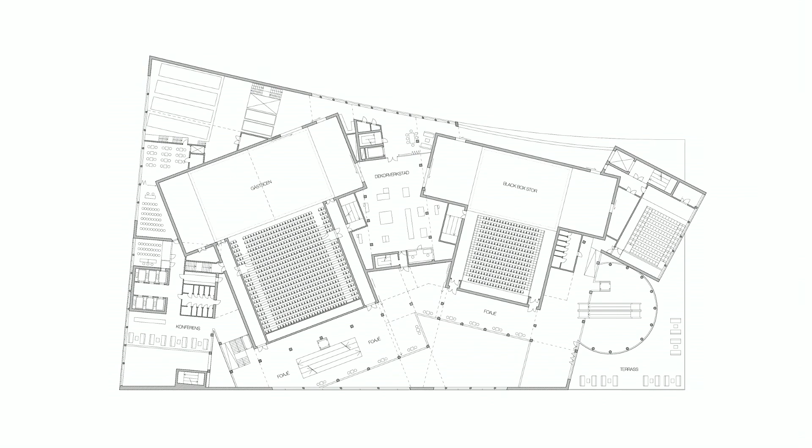Each feature or add-on would direct views towards a particular vista in the surrounding landscape, hence the title of the project, the Tower of Many Views.

Together, the varying views set the basis for a continuously unfolding narrative that links the tower to the specificity of the landscape surrounding it. And finally, a flying balcony at the top that offers panoramic views high above ground.

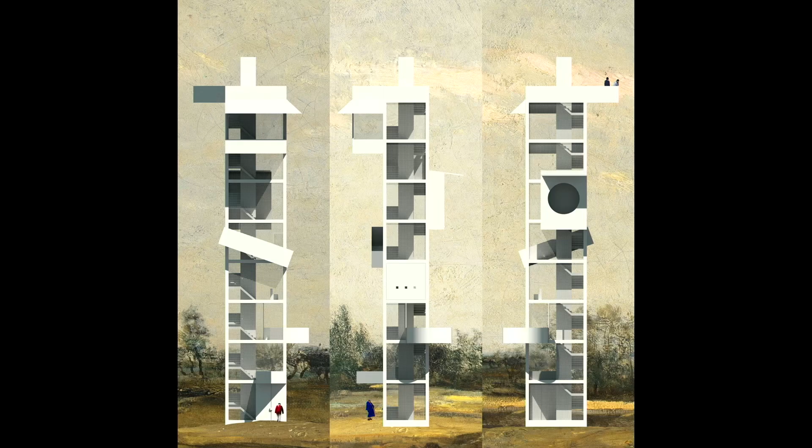Here we see the tower situated in the landscape. So the tower becomes a viewing machine, a vertical collection of framing devices.

All right, so now on to some examples of private residences that we've been working on lately. Several of these residences are houses that explore a kind of playful monumentality through composition, proportions, fenestrations, etc. How can one make a 120 square meter house kind of still seem big and significant?

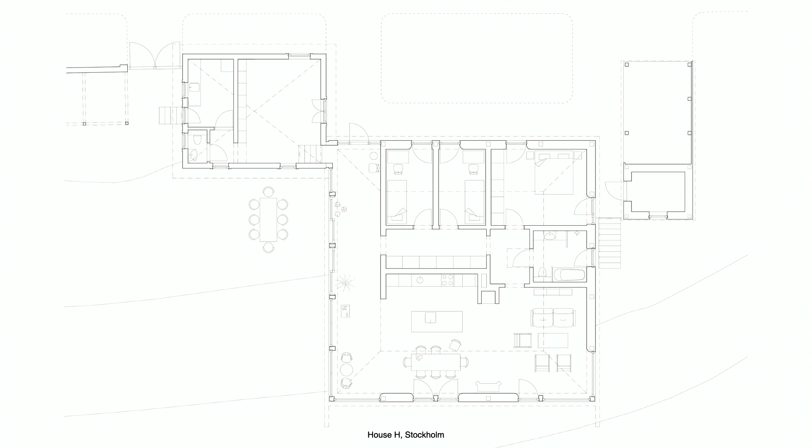Okay, so like many architects, we are often asked to do a lot on a limited budget. This summer house for a young family who had bought a small lot just south of Stockholm in a pastoral landscape characterized by mixed forest and open fields. This house became an example of that, let's say.

To increase a sense of privacy in relation to the neighbors, we proposed two walls. One actual wall on the right-hand side in this drawing, and then a wall-like house on the other side. The neighbors here, they are ordinary, but not ordinary in a beautiful way, but kind of ordinary in a just ordinary way.

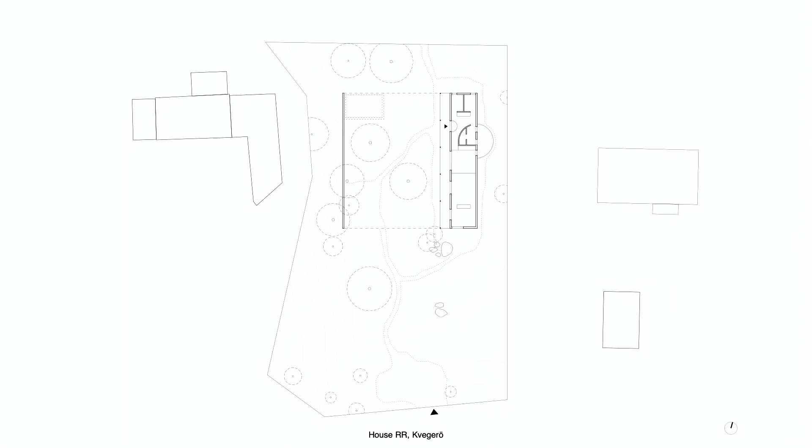So we thought it was good for the house to shield them off somehow. There is this veranda or loggia that opens to the garden, and then a small circular patio on the back of the house. The interior is basically one elongated space that is loosely divided into social and private spheres that extend onto the veranda, which spans the full length of the house.

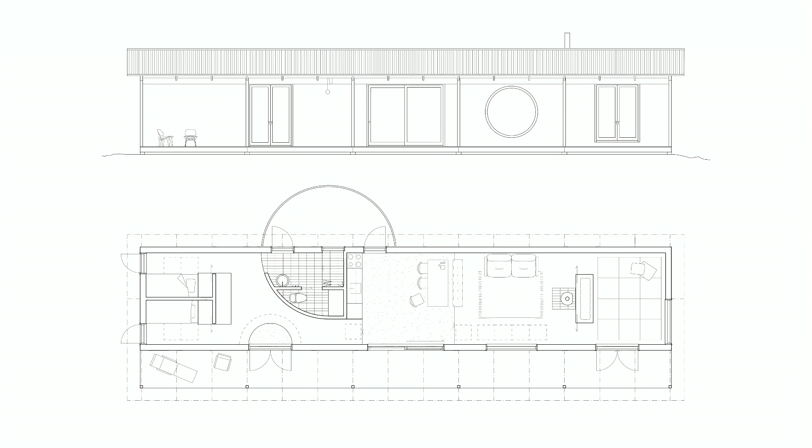As Daniel said, we enjoy making these quite big models to explore the architecture. Here, the exterior has a rhythm of post and raft details, against which there is this play between different geometrical openings.

Approaching the site, a small pitched gable appears on a gently sloping hill facing a field. Coming closer and moving up the hill into the garden, now the main facade is revealed, fronted by the veranda.

The sense of order that the facade brings is sort of loosened once we enter the house. The interior is an open space that has been furnished with four monomaterial masses, let's say, and together with shifts in floor levels, these masses loosely define the spaces.

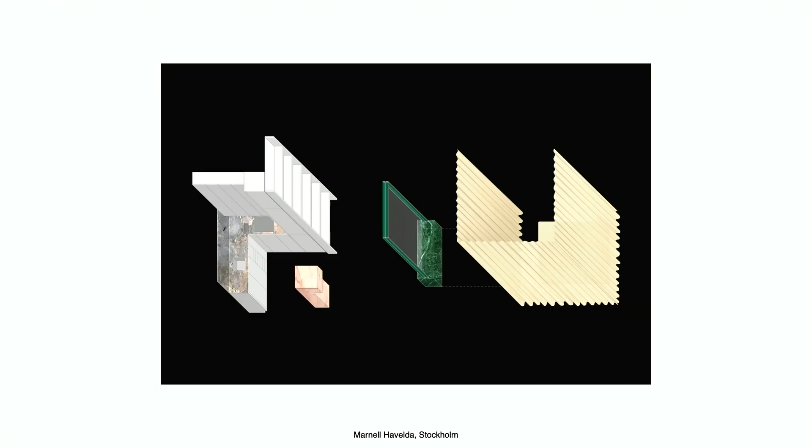Sometimes we do apartments and interiors as well. Most buildings in central Stockholm, where we have the projects, are built somewhere between 1880 and 1930, so there is often this historical aspect to take into account.

Especially the apartment here explores a similar approach to the small house that we just showed, where the interior, or much of the design, happens in between the scale of furniture and architecture, let's say. And together a series of spatial relations makes the room seem spacious and varied, despite their relatively modest size.

We designed this apartment for a family that then grew and moved into a larger one, which we are currently working on.

With this type of work, there is often this typical request from a client who wants to rethink the space plan so it better suits the life of today. And we often find ourselves negotiating this while somehow paying attention to the origin of the building and the character of the existing architecture.

So this is an ongoing work, let's say, but now onto some more speculative practices or projects.

For some time now we have been working on how architecture can come about by collecting, altering and recombining existing things. It's about things that start from other things, or things that might have been lost and found. We're interested in how used building elements and materials can contribute to a shift in mindset in architecture.

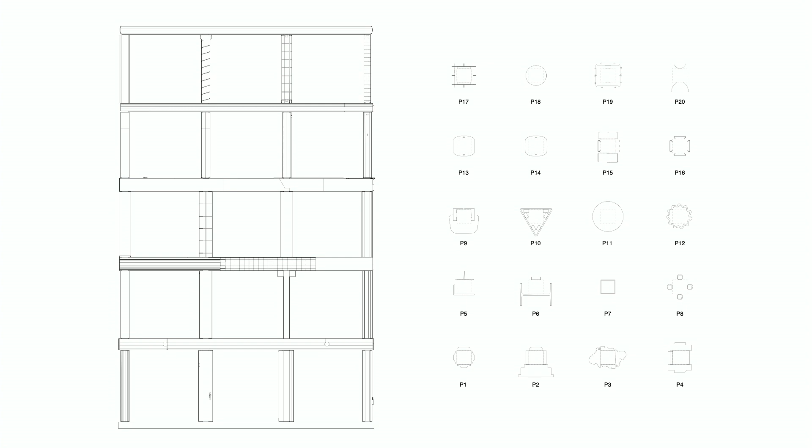An issue was also that the project was installed and the exhibition opened during COVID, so there was no possibility for us to be around when the technicians put the pieces together. Therefore we had to develop really precise documentation.

The design was also conceived using partial mock-ups in our studio and a digital model that incorporated material qualities such as glossiness and patina.

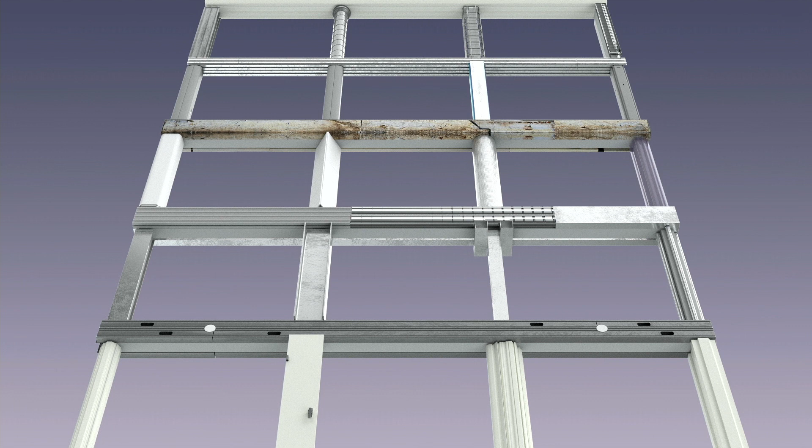The composition explores the different aging of materials as well. Solid aluminum profiles, for instance, even if they're really old, have literally no signs of age, while other materials can have a lot of patina.

Here's the 5-meter tall structure in the exhibition hall at the museum. Based on the building elements' qualities, materiality, color, scale, patina, etc., we developed a loose associative order that told us where the different elements would go.

So the city is filled with stuff, objects and architecture. How can a close look at such existing material, the way it's used, its genesis and varying temporality, as well as the flows that support it, be turned into a proposition for architecture? This work was an attempt to begin to study the question of how architecture can incorporate elements from radically different origins and still somehow make sense as a whole.

Another thing we wanted to do with these kinds of projects is to understand the life of building materials. Like, for instance, what happens to elements and materials when buildings come to an end?

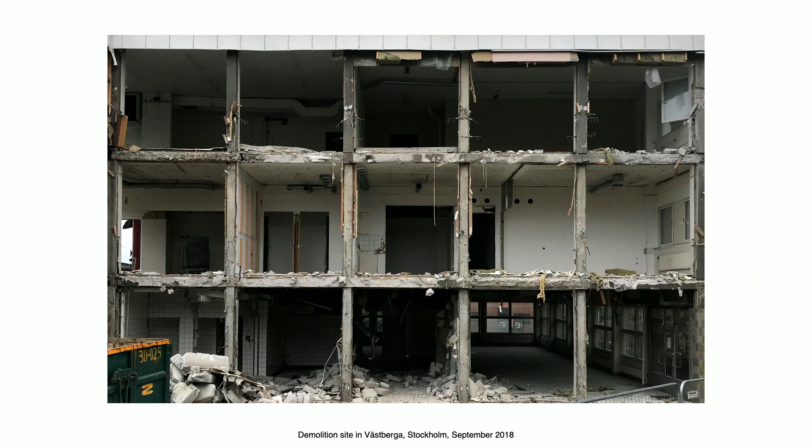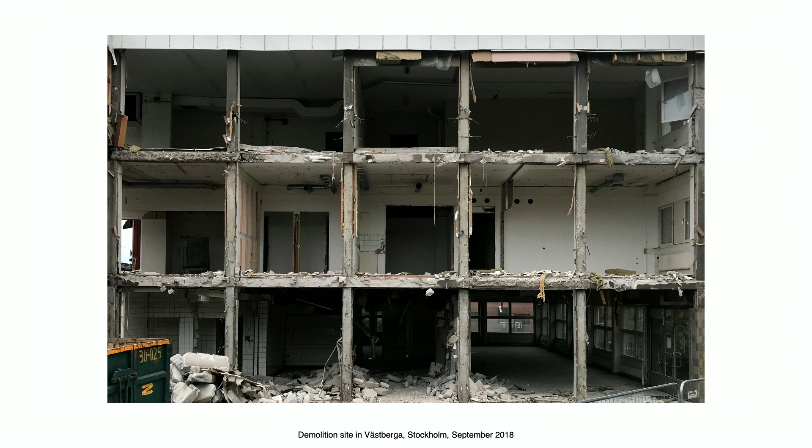Since around 5-6 years, we have been doing a series of excursions and scavenger hunts where we visit demolition sites, different outlets for used building elements, recycling centers, and even active landfills, to talk to people who work in this flow of used materials. On such visits, we sometimes collect used materials such as concrete rubble, plastics, bits of plasterboard, and steel studs, etc.

During these trips, a demolition worker told us that these building elements are the ones valued today - i.e. elements that are either very old and have a lot of character, or ones that are really new and standardized. But the rest, what makes up most of the built environment around us, still has no real value once it's deinstalled.

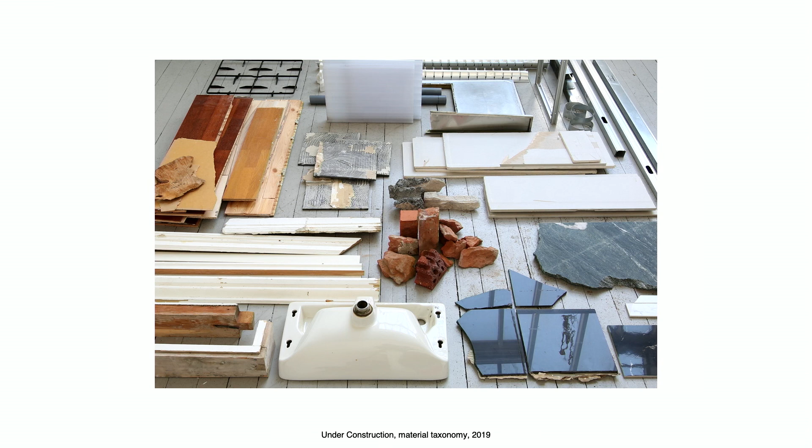One of the most persistent architectural conventions is to consider abstract space before material entities. Building elements and materials should be subservient to a larger whole. To us, this approach is aligned with a view on the world inherited from industrialism, where anything can be sourced anew and molded into shape indefinitely, as if the world were endless.

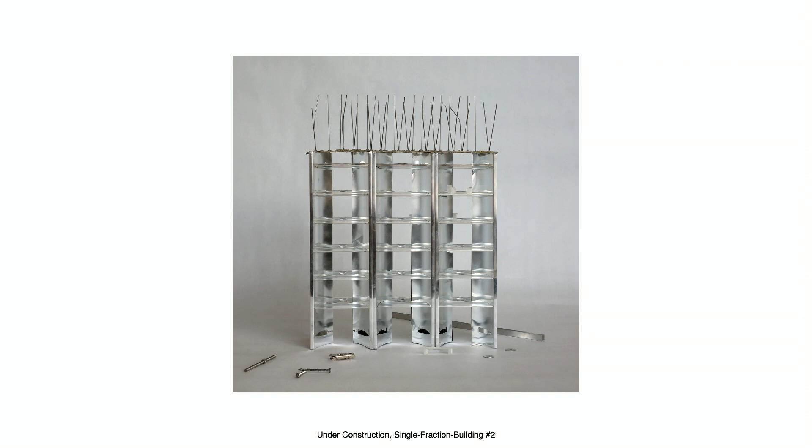As further responses to principles linked to flows of used goods and recycling, each of the five houses consists of one type of material. This mono-material approach corresponds to thinking of materials in terms of fractions throughout their life cycle, which significantly increases their possibilities for future disassembly and recycling. So each building becomes a depot of materials, which later can be rearranged into something else.

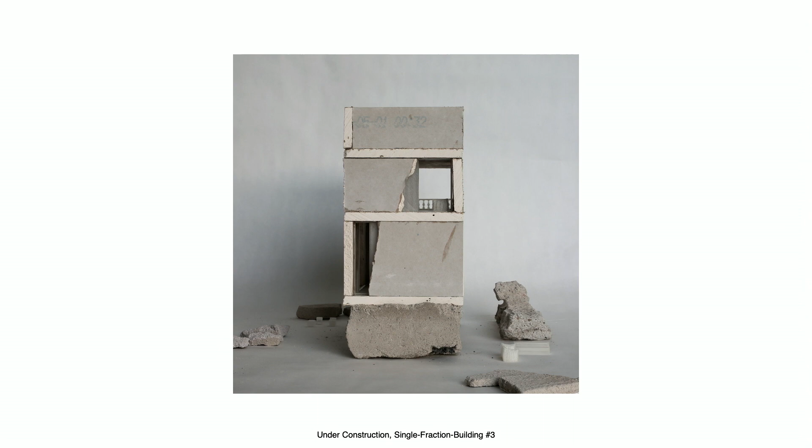Working with this project became an opportunity to playfully cycle through architectural references. Here we can see some perhaps John Hejduk-like anti-dove spikes arranged on some metal light diffuser to create a specific character. And here, plasterboards becoming concrete slabs, or plastic panels repurposed as giant waffle slabs, like in Toyo Ito's Sendai Mediatheque, if anyone remembers that building.

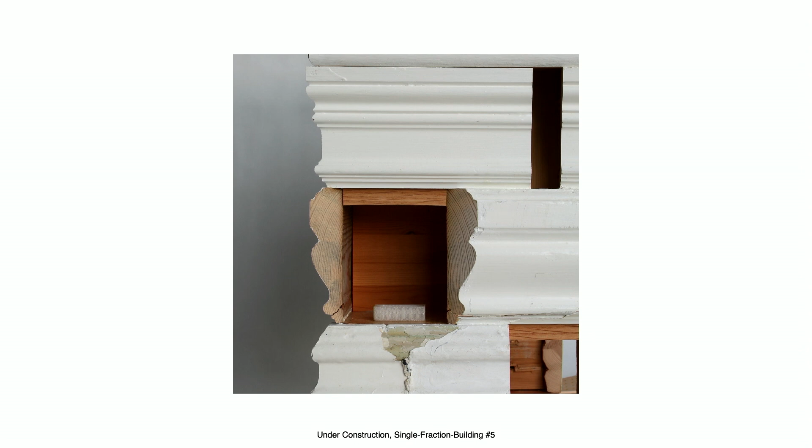Each type of material seemed to suggest its own logic in terms of detailing and assembly. In general, we're interested in acts of translation, like here, where accidental marks get a new meaning. And together, these buildings form a fictional neighborhood with streets and plazas.

An aim with this project was to link the design and construction of the model here to the material flows that the project seeks to address.

And there's obviously a play with representation going on. Qualities belonging to the collected pieces, like materiality and patina, reinforce a reading of them as being real and undisguised, but at the same time, the model makes it quite clear that they could be read as representing something other than themselves.

The Triennale in Oslo was themed the Architecture of Degrowth, where Interrobang, the curators, explored this idea of degrowth to limit endless extraction of materials and natural resources. How can architecture respond to this in terms of practice, aesthetics, urban life, etc.?

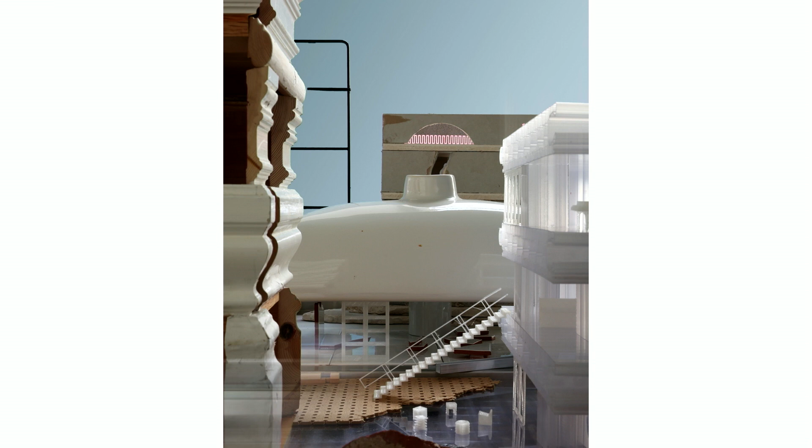And of course, such thinking can be linked to the past. Being here in Brussels now, I imagine many of you are quite aware of architecture's rich history of designs that depart from a used stock of materials. Reuse was common in pre-modern and postmodern times, illustrated here with spolia on the left-hand side, from the Middle Ages, and the quirky practice of ad hocism of the late 1960s.

One thing these two examples have in common is that they displace and recontextualize objects from their normal setting or function. In pursuing work of this kind, we've noted that used building elements often have qualities and dimensions that resist standard means of architectural representation and production.

So here are a few slides of a small research project called Completions, that outlines an approach to reuse where building elements are integrated into new assemblages by means of 3D scanning and fabrication. The project surveys, completes, or repairs elements found in a state of disrepair with adjoining parts.

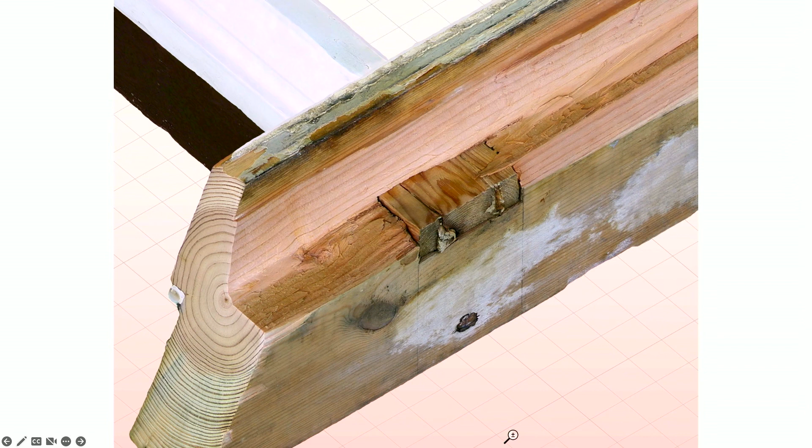This work explores how the exactitude and rich materiality of models obtained with 3D scanning can provide an alternative to the abstractions that come with typical CAD drawings. The scanning process, unlike the eye of a human conducting a survey, does not discriminate between what has been intentionally designed and what is circumstantial, such as the patina in this old window frame. This ability to see objects devoid of human preconception resonates with a speculative reuse practice.

Taking cues from spolia and ad hocism, our completions lie somewhere in between dutiful repair and an exquisite corpse. Here is the completed window frame, where two of the sawn-off ends are effortlessly bridged—or let's say effortlessly.

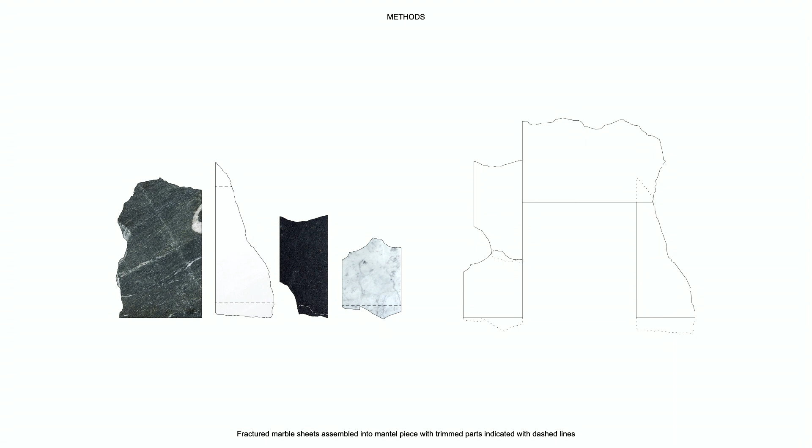By playing with straight edges and fractured edges of leftover marble sheets, these fragments of marble start to form a grotto-like mantelpiece. Here's a detail where the edge of one stone is cut to perfectly match the randomly fractured edge of the other, through water jet.

Finally, a double door where the wear and tear of the original door is transferred over to the matching new piece. So again, the accidental characters of one piece—worn paint and shifts in color—start to suggest a reading of them as intentional articulation.

To depart from something existing is not necessarily about reuse in a practical sense to us. It could also be about seeing, and about paying attention to what is there.

This is the final project in this series of small research-based projects, addressing the domestic interior, or the home. The starting point was a careful documentation of occupied rental apartments in different locations in Stockholm, using a laser scanner.

We were interested in the relation between the architectural framework of a room—the floors, walls, ceiling—and all the furniture and stuff that dwells in it.

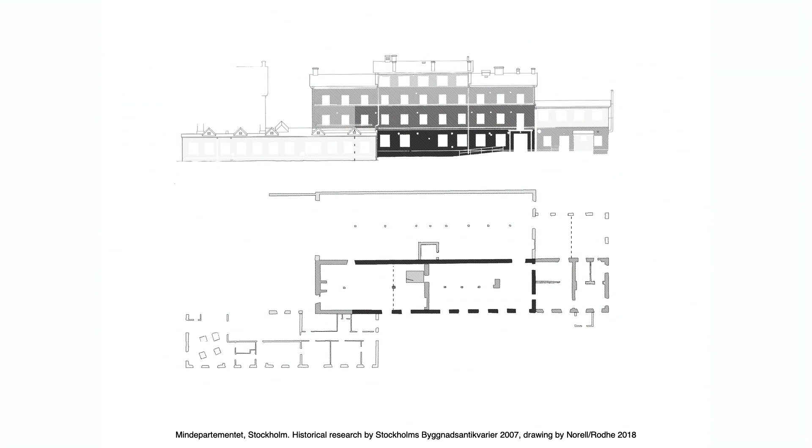Here's the exterior of the building as it stands today, and as you can see, it has a strong sense of unity that almost completely disguises the fact that it's a building that is an assemblage of extensions.

As you might know, Stockholm is a city built on islands. In the center of the image you have the old town, and to the right is a smaller island called Skeppsholmen, once dedicated to shipbuilding and the Navy, now home to several cultural institutions, including the Museum of Modern Art.

After suffering a big fire a few years ago, the Institute of Art is now growing again using the building stock of the island. So the island becomes like a campus for the Institute.

The building that we've been working with in this project is the black building to the north. The Institute's main building is the larger gray building in the south, a building we're currently doing a major transformation of, that I'll talk more about in a minute.

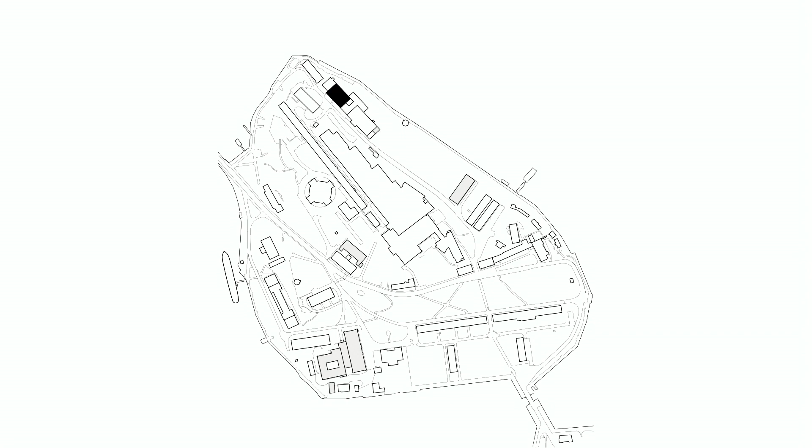Our transformation of the building treats it as a found object, and the design aims at turning old accidents into architecture, essentially. For example, in the 19th century, as the building had to grow vertically, an architecture professor at the institute added structure to support the upper floors, the braced timber posts placed in front of the windows that you see here.

The drawing shows how we insert a new partition wall to create seminar rooms further towards the back, and how this wall becomes a backdrop for the posts, and how the windows are projected to form new windows.

The project was a response to a new, less hierarchical model for art education developed by the Institute, one where faculty, students, and workshop staff are grouped around a subject rather than based on academic rank.

Here we can see discursive spaces, such as seminar rooms, towards the bottom of the plan, and spaces for production, such as a film studio, towards the top.

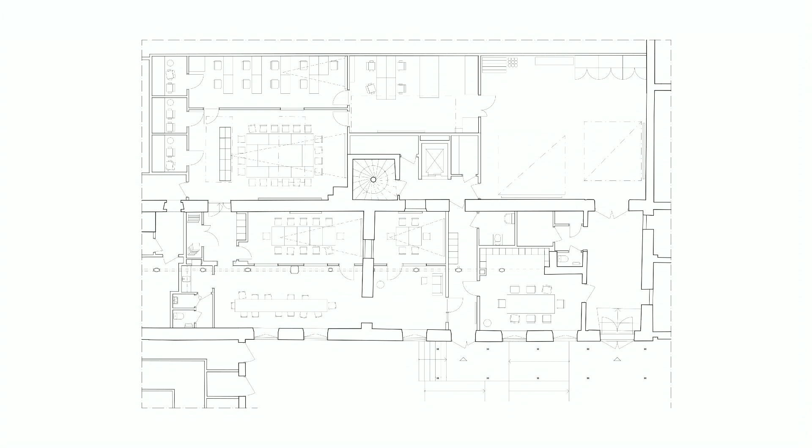We started the project with an inventory of the spaces as well as other hidden resources of the Institute. To the left is one of the timber posts, and as you can see, it was completely cluttered by later additions. We wanted to unclutter it and emphasize it.

The image in the middle shows a set of beautiful chairs in the school's extensive warehouse, designed in the mid-1990s by Swedish furniture designer Karin Norell. Scouting the Institute, we also found some old stoneworks that were samples from students' and professors' work.

Most of the photographs I will show now were taken by our friend Mikael Olsson just before the school opened. Being an art school, the rooms are now, both luckily and unluckily, gradually transforming beyond our control.

This is a student and faculty lounge, a loosely programmed space for spontaneous work, for lunches, coffee, and conversation. Social and discursive spaces like this, where students and faculty would meet, were an important part of the brief.

Here a professor would organize lunches once a month for staff and students, where they would cook together and discuss specific topics. We also designed a series of furniture pieces especially made for the project, including this greenish concrete table.

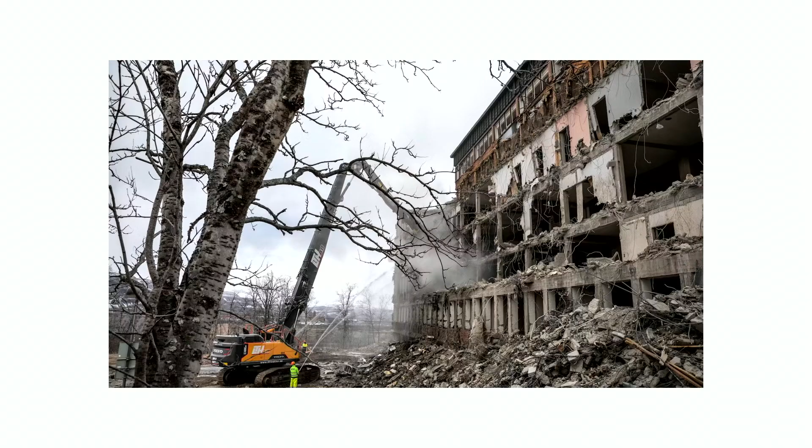But larger buildings are typically just demolished without ambitions for reuse. This is the old city hall, a really fantastic building, which they took down and crushed into pieces. They took some artworks and some of the finest interiors were saved, and they took the door handle of that building and put it on the new building. But beyond that, there wasn't much ambition on saving building materials.

So in our project, we propose a scenario in which all buildings in the demolition zones from all periods would be systematically inventoried to identify parts suitable for reuse. It could be individual building elements, such as columns, beams, windows, and so on, but also larger chunks, like parts of facades or floor slabs.

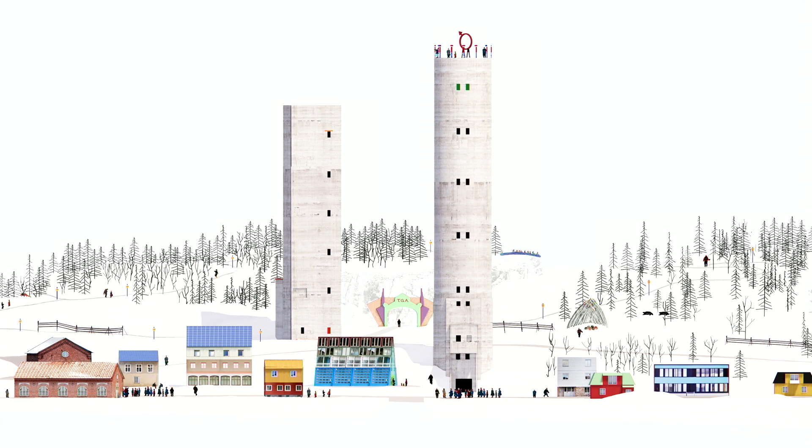This model also shows on the left-hand side the new city center, built with the European city as a model, with 6-story tall closed city blocks and narrow streets. That might be really beautiful, but at this latitude, with the low sun, it also means a really dark city. So with our work, we wanted to point in another direction.

Our sketch draws inspiration from the Sami building culture, which has a much more take-what-you-have-at-hand approach. Something that typically results in small-scale architecture built with locally sourced materials.

So these buildings, we hope they will be constructed from parts of buildings from the old Kiruna, either like collages of several buildings or by rebuilding a fragment of a large building.

And in the center, we have proposed a greenhouse as a direct result of the meeting we had with school children and their wishes.

And you can also perhaps see this portal in the back that is a reconstruction of a historical entrance gate to the mine. It shows the way to recreational landscapes behind the towers.

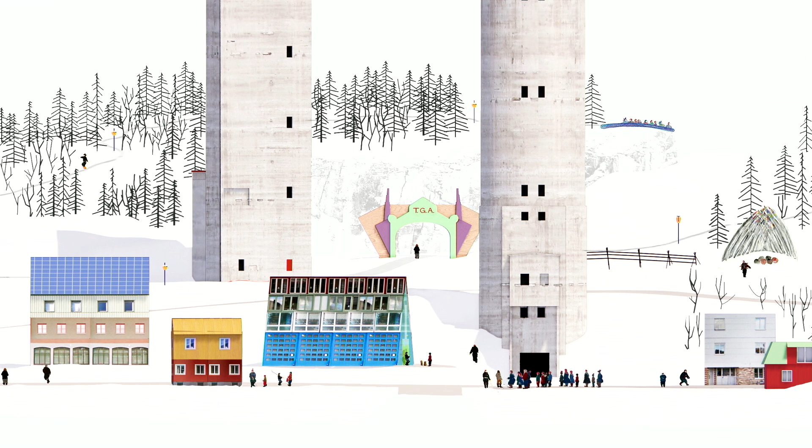And here, the existing brick buildings surrounded by our new buildings, including the yellowish building constructed from parts of the Swedish architect Ralph Erskine's iconic residential building in Old Kiruna, which is being demolished right now. And in the back, some footpaths that extend out to the landscape.

The sensibility of this set of drawings were influenced by our team member Britta Marakatt-Labba and her monumental embroideries on Sami culture.

Okay, now we are finally on the ground, on the main street in this new neighborhood. Our vision with reuse here was, of course, not only prompted by sustainability issues, it also addresses the collective memory that citizens of Kiruna have in the old parts of their city. The parts that now are being demolished and that soon will be gone forever.

So the buildings that would be erected here in Tuolluvaara would become carriers of this collective memory. They would shape the identity of the new neighborhood just like they shaped the old parts of Kiruna, but in configurations with a new agenda.